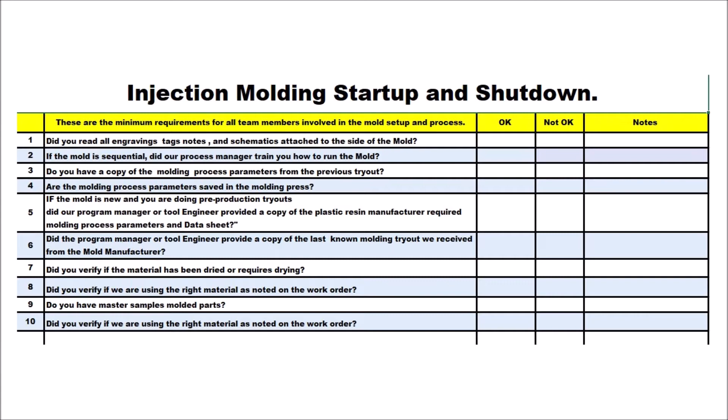Did the program manager or tool engineer provide a copy of the last known molding tryout we received from the mold manufacturer? Did you verify if the material has been dried or requires drying? Did you verify if we are using the right material as noted on the work order? Do you have master samples molded parts?

Must do for preventing crash and damage to the mold. If the mold is not running production and it is in the press, keep it closed and keep the hot runner off. If the mold is in the press warming up for production, keep it closed. If the mold is in the press but stopped production for unexpected issues, keep the mold closed. If the mold is in the press for a tryout but no one is available for the tryout, keep the mold closed and keep the hot runner off.

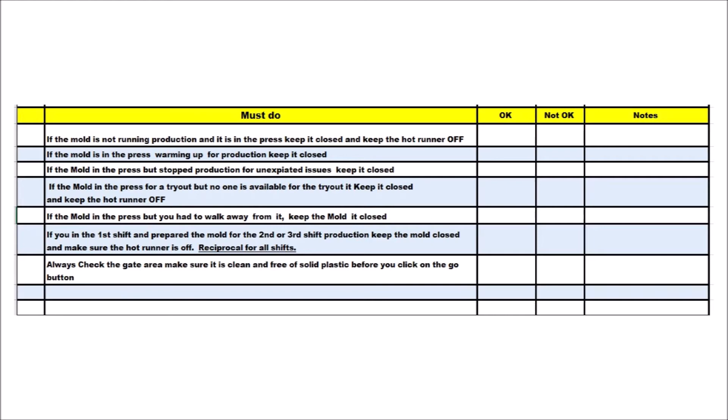If the mold is in the press but you had to walk away from it, keep the mold closed. If you are in the first shift and prepared the mold for the second or third shift production, keep the mold closed and make sure the hot runner is off. Reciprocal for all shifts. Always check the gate area, make sure it is clean and free of solid plastic before you click on the go button.

Quick check and overview of the mold. These are tasks for the process technician or engineer. Check all water lines, make sure they are connected correctly in and out. Check the hot runner box and connectors, make sure there are no loose or damaged wires. Check the nozzle orifice and sprue orifice for match up. Make sure the cavity and cores are cleaned. Make sure all vents are open. Look for leaks and cracks.

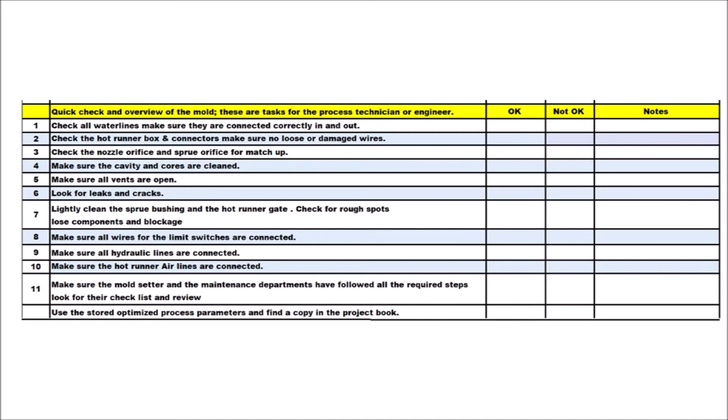Lightly clean the sprue bushing and the hot runner gate. Check for rough spots, loose components and blockage. Make sure all wires for the limit switches are connected. Make sure all hydraulic lines are connected. Make sure the hot runner air lines are connected. Make sure the mold setter and the maintenance departments have followed all the required steps. Look for their checklist and review. Use the stored optimized process parameters and find a copy in the project book.

Startup, in general. When starting up an injection machine that has been in operation, it is best that all the barrel and downstream components have reached the set zone temperatures for a minimum of a half hour. Some machine manufacturers preset the machine with a soak delay to make sure that the equipment is not cold started. After all of the zones have gone through the proper soak time, the screw rotation can be initiated.

The screw speed should not exceed 15 to 20 RPM, so as not to damage the contact surfaces of the screw and barrel. As soon as the screw reaches the set speed, the slide gate on the hopper can be opened. Must start with purging the system clean from old material. Know the optimized process parameters.

Turn on and or raise the temperature to 50 degrees Fahrenheit or 10 degrees Celsius above the minimum operating temperature for the purging material. When the desired temperature of the purging material has been reached, begin rotating the screw slowly to avoid too much torque. The purge may still be stiff, so do not rotate the screw at full RPM. If the purge compound exiting the machine shows signs of contamination, introduce more purging material until the compound flushed out is clean. Thoroughly clean the hopper and adjust temperature settings for your next production resin.

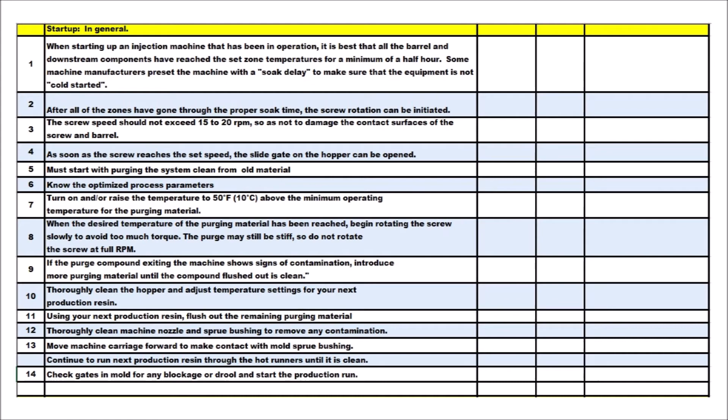Startup for the barrel and screw. Maintain temperature and RPM settings for resident resin from the previous run. Retract injection unit from mold, leaving ample room for purge to exit the nozzle.

Disconnect or shut off auxiliary feeding equipment and thoroughly clean material feed system, ensuring all components including blenders, hoppers, loaders, filters, magnets, hoses, and drain ports are cleaned. Empty barrel and screw of the resident resin.

Review your process sheet for the proper mold temperature settings for purging. Add purging material, 1 to 2 times barrel capacity, into empty hopper or side port. Note, actual amount needed depends on machine conditions. Increase the back pressure to the maximum safe level and, with the screw in the forward position, begin to purge.

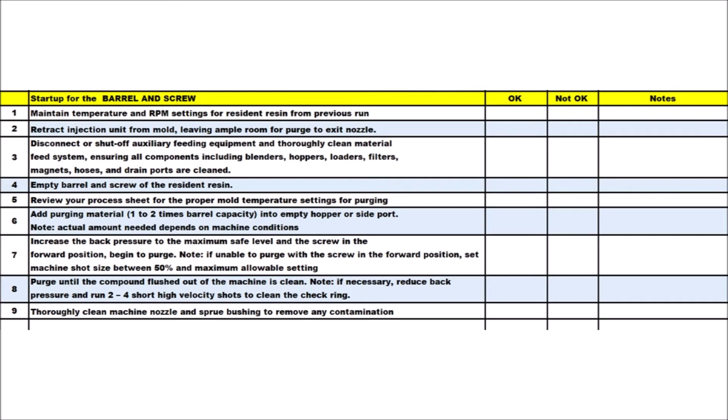Note, if unable to purge with the screw in the forward position, set machine shot size between 50% and maximum allowable setting. Purge until the compound flushed out of the machine is clean. Note, if necessary, reduce back pressure and run 2 to 4 short high-velocity shots to clean the check ring. Thoroughly clean machine nozzle and sprue bushing to remove any contamination.

Start up for molding and the hot runner. The screw RPM should be checked and set during initial start-up on purge material. Important detail, final screw RPM should be determined during the molding cycle. The back pressure should also be checked and set during initial start-up on purge material or after the first shot into mold. Normal suggested start-up back pressure should be 50 to 75 psi, see the material data sheet and the optimized molding parameters. Review the optimized process sheet for the proper mold temperature.

Review your process sheet for the proper hot runner temperatures. All zones must be set per the material supplier recommendation. The hot runner temperature controller display must not deviate from the optimized process parameters and must not fluctuate during molding. Make sure the mold and the hot runner system have reached their required temperatures. Before the first shot into mold, move injection unit forward to make contact with mold sprue bushing.

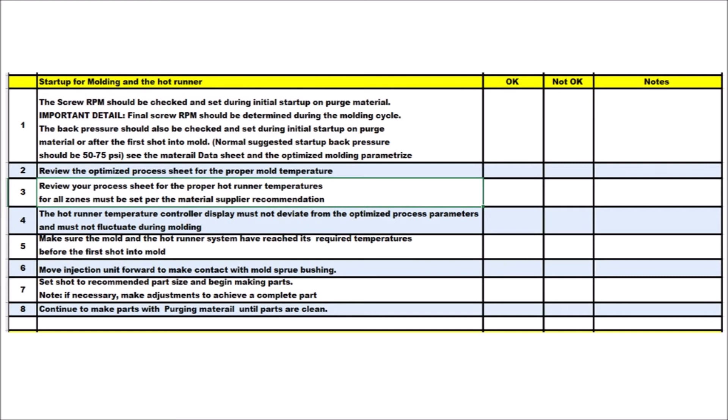Set shot size to the recommended part size and begin making parts. Note, if necessary, make adjustments to achieve a complete part. Continue to make parts with purging material until parts are clean. Switch over to the required molding material. After the acceptable conditions have been obtained with the purge material, switch hopper to feed the required plastic resin. Make sure you are using the required plastic resin, no contamination. Make sure the plastic resin is dried as required.

Connect or turn on auxiliary feeding equipment and thoroughly clean material feed system, ensure all components including blenders, hoppers, loaders, filters, magnets, hoses, and drain ports are cleaned. Make sure the mold and the hot runner system have reached their required temperatures. Before the first shot into mold, retract injection unit from mold, leaving ample room for purge to exit nozzle.

Using your next production resin, flush out the remaining purging material. Check gates in mold for any blockage or drool and start the production run. Check the material and make sure it is dried as required. Make sure all temperatures are set per the optimized molding parameters. Thoroughly clean the hopper and adjust temperature settings for your next production resin. Use the optimized molding process parameters.

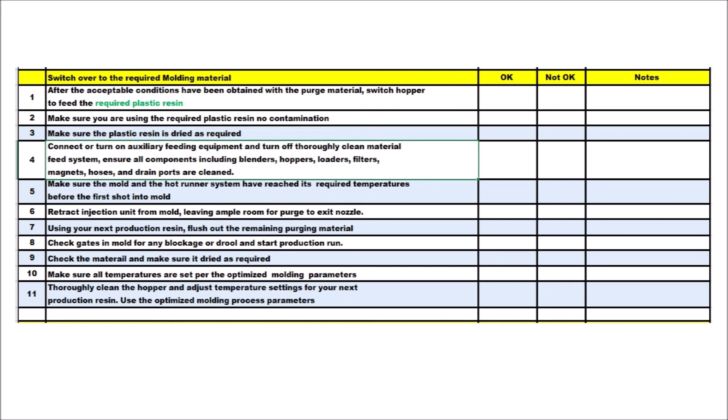Mold shutdown. Maintain temperature and RPM settings for resident resin. Make sure to review shutdown protocol notes from previous runs. Retract injection unit from mold, leaving ample room for purge to exit nozzle. Disconnect or shut off auxiliary feeding equipment and thoroughly clean material feed system, ensuring all components including blenders, hoppers, loaders, filters, magnets, hoses, and drain ports are cleaned. Empty barrel and starve the screw of the resident resin.

Add purging material, 1 to 2 times barrel capacity, into empty hopper or side port. Note, actual amount needed depends on machine conditions. With the screw in the forward position, purge until the compound flushed out of the machine is clean. If unable to purge with the screw in the forward position, set machine shot size between 50% and maximum allowable setting.

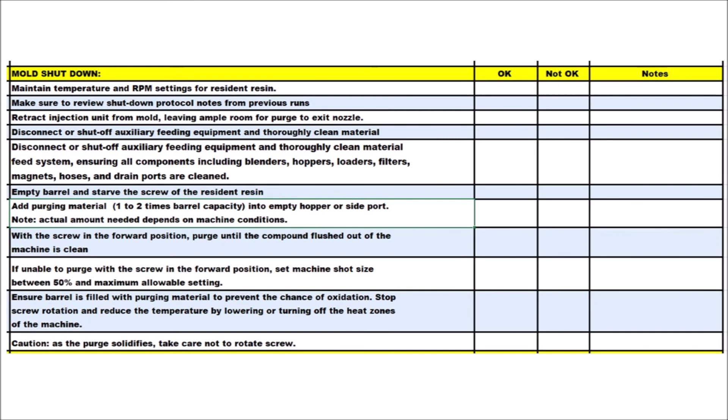Ensure barrel is filled with purging material to prevent the chance of oxidation. Stop screw rotation and reduce the temperature by lowering or turning off the heat zones of the machine. Caution, as the purge solidifies, take care not to rotate screw.

General notes. As a rule of thumb, super small shot sizes, using less than 20% of the barrel capacity, often lead to long residence times, which in turn lead to polymer and color degradation and poor process control. Plus, big screws usually mean lower plastic pressure capability. Large shot sizes, using greater than 65% of the barrel capacity, tend to have melt quality issues like unmelt, poor melt uniformity, and long screw recovery times.

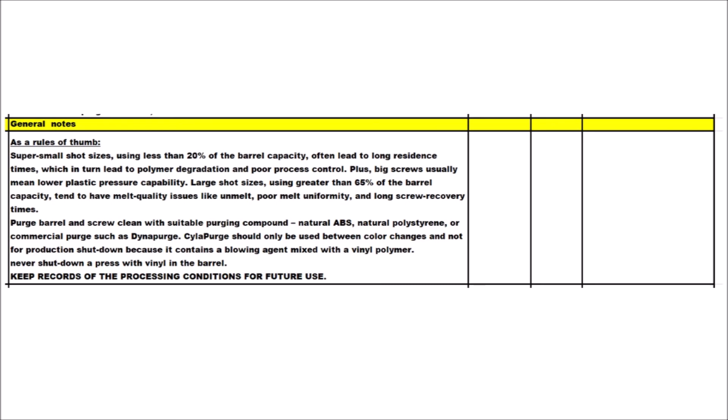Purge barrel and screw clean with suitable purging compound, natural ABS, natural polystyrene, or commercial purge such as Dynapurge. CylaPurge should only be used between color changes and not for production shutdown because it contains a blowing agent mixed with a vinyl polymer. Never shut down a press with vinyl in the barrel. Keep records of the processing conditions for future use.

Warning, it is important that vinyl compounds and acetal or acetal copolymers, such as Delrin or Celcon, never come in contact with each other at processing temperatures. At processing temperatures, the two materials are mutually destructive and will react violently.